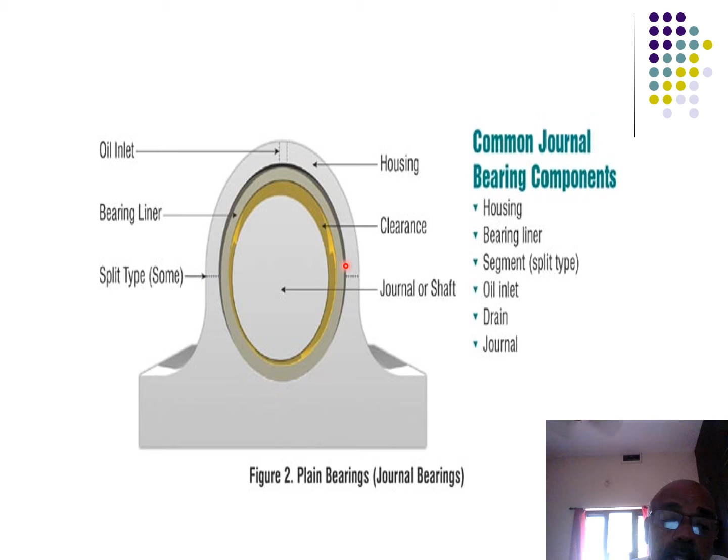This is journal bearing, as I told you. Clearance will change from maximum value to minimum value during the stationary part. When it is rotating, the clearance value will change. In this clearance area only we are providing the lubricating oil. This is another version showing clearance, mentioned along with terminologies: load, rotation direction, loaded zone, etc. Some terminologies are also mentioned in this figure.

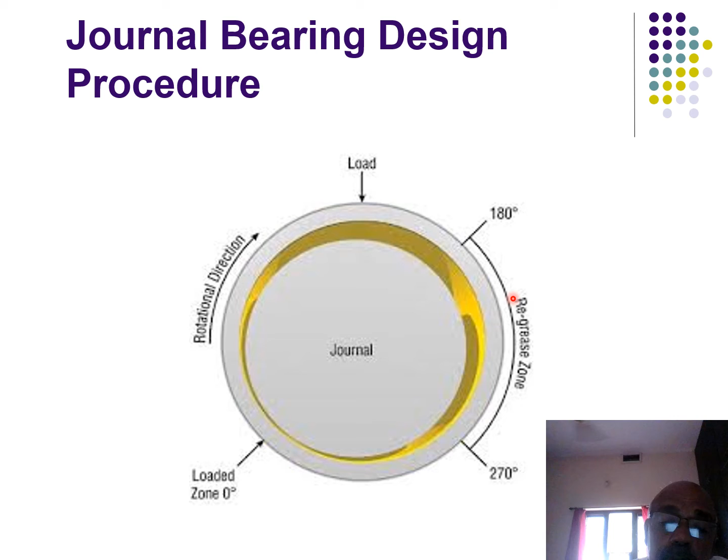Diameter D, when you go for calculation, the fundamental point is how to fix the length and diameter of the journal bearing. For that, one equation you can use is capital P by small p into D, where capital P is the load, small p is the allowable pressure, D is the diameter of the journal. Suppose you want L, capital P already load value will be mentioned, p you have to get from the data book, D also you have to fix.

But simply fixing also no use. For that you have to check with another equation, the L by D ratio, from the page numbers mentioned here and here. Corresponding pages you have to check whether, after calculating, you get one value of L, no doubt. If you substitute all the values you get L. P is given, small p from the data book, D you have fixed. But don't think the calculation is completed — you have to go for the L by D ratio. For that, the typical page you have to see based on the application selected. The L by D ratio matching with your D value and L value means your calculation is correct.

If the L by D ratio is not matching, you have to change the value of D, because you are calculating L, so definitely D only needs to change. This trial and error method will continue for some time until finally you reach the L by D ratio value, and then you can fix the L and D values. This is the basic design of a normal bearing.

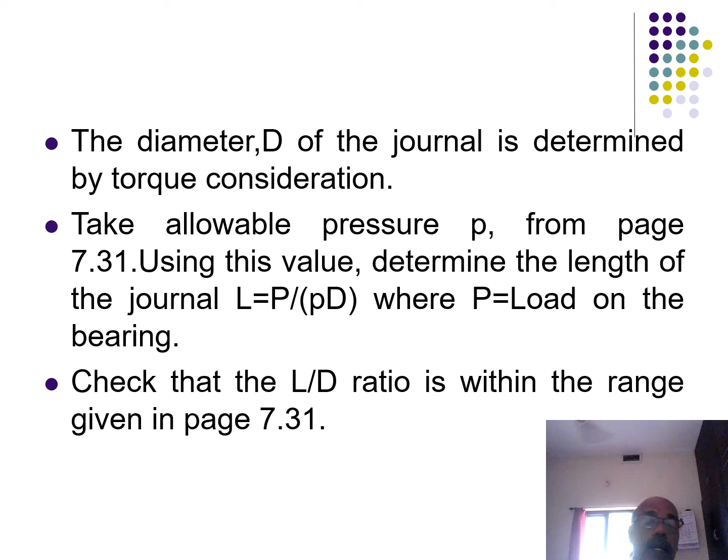For that you have to fix the value of speed. For that, again one more equation will help you, called McKee's equation, to calculate the viscosity. Viscosity you can substitute here, and finally you can fix the value of speed of the shaft. If the speed is given, directly you can fix the Z value; you need not check with McKee's equation.

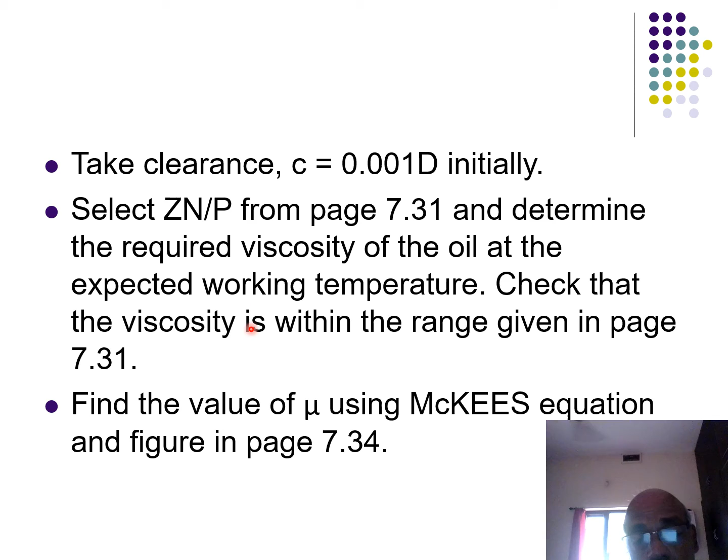That is the viscosity. What you have to do is again go to the application page, to see whether that viscosity value is mentioned, so your calculation is accepted. Suppose the data book viscosity value and your calculated viscosity value are different, then you have to check the calculation and make corresponding corrections.

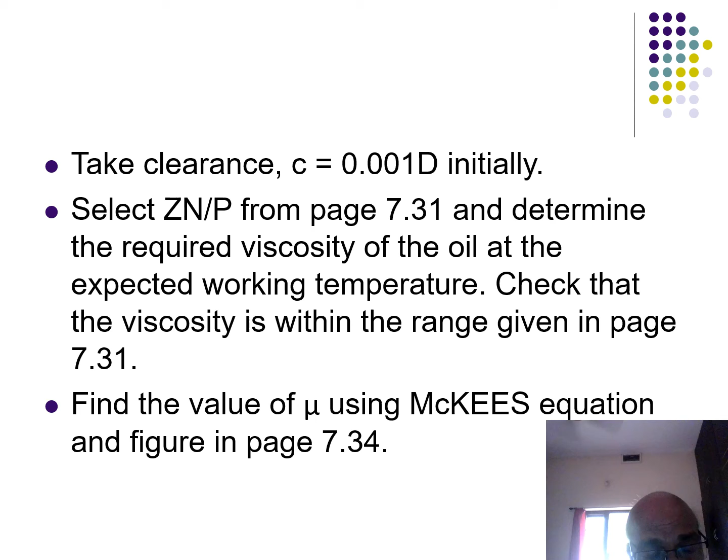Now one more step is there. I told you during the rotation heat will be generated. You have to tally the equation: heat generated should be equal to heat dissipated. There are heat generated equations available in the data book, and heat dissipated equations, empirical relations, available in the data book. When you substitute that equation, finally you have to see that both are equal.

Then only you can see that heat is not accumulated in the bearing. Suppose it is different, heat will be accumulated in the bearing, and finally the bearing will collapse after some time - not 1 hour, 2 hours, but after 10 years or 12 years it will collapse. Some other time it will be slightly greater, which means no problem - heat generated slightly more also, heat will not accumulate so much, that's also permitted.

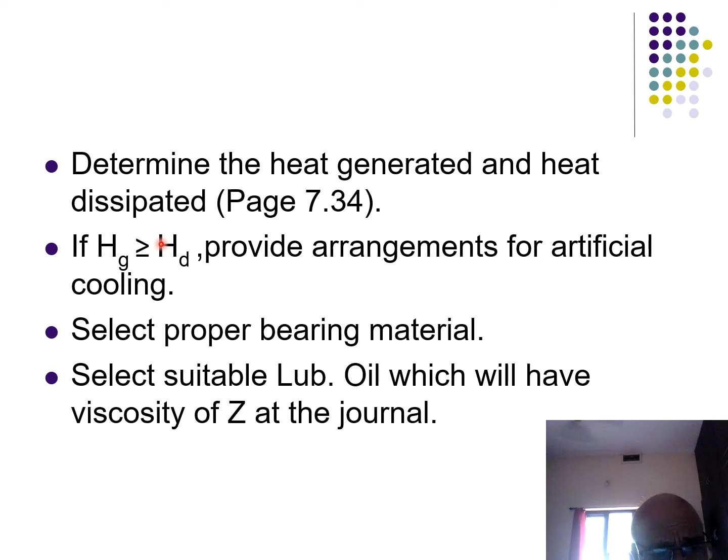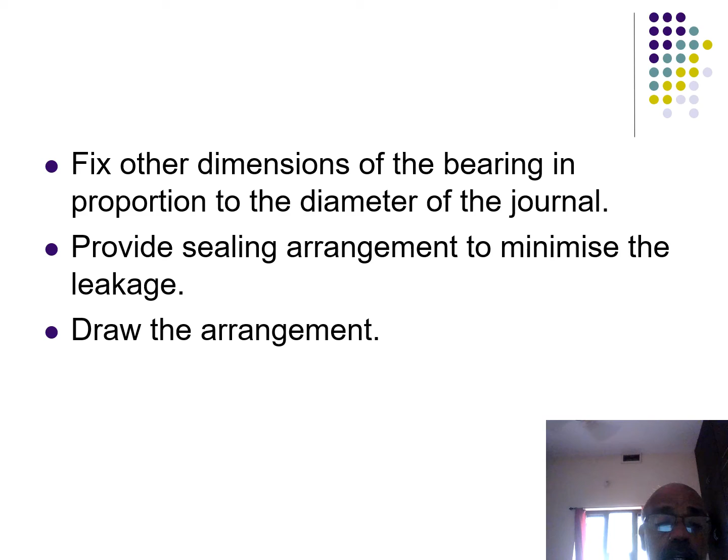Fix other dimensions of the bearing, in proportion to the diameter of the journal, provide sealing arrangement to minimize the leakage. Draw the arrangement. Rolling elements of bearing - this is nothing to explain here.

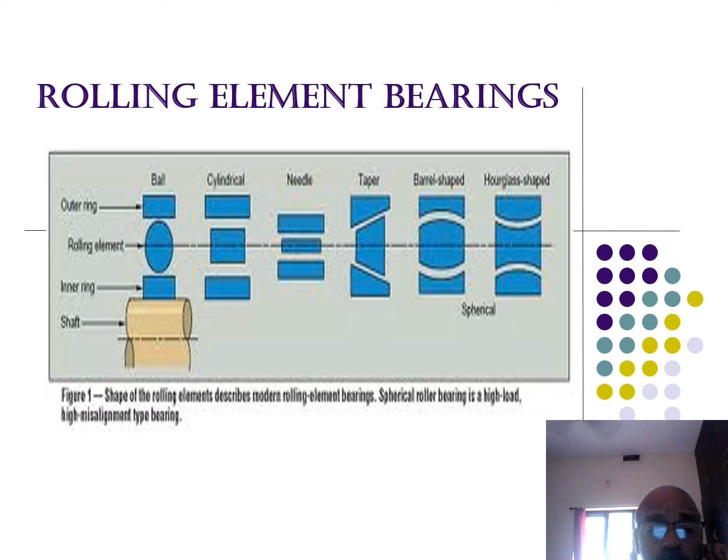Using these photographs, you can see ball and taper bearing, roller bearing, ball bearing and taper types of bearings. Ball and roller bearings' characteristics: frictional resistance is less, rotating or non-rotating pairs, ball or roller has rolling contact. For plain bearing the starting resistance is much larger, while for ball and roller bearing the initial resistance to motion is only slightly more. These are the explanations given for ball and roller bearing.

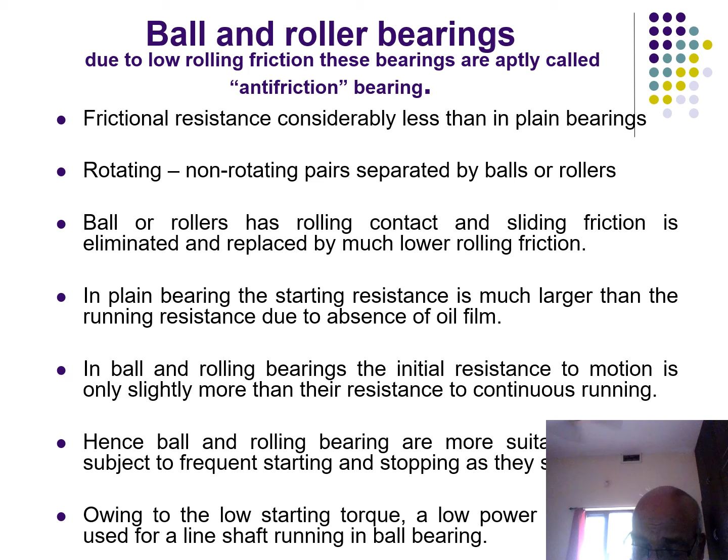Go through and understand. Types of roller bearing: two - single row deep groove bearing and single row roller bearing.

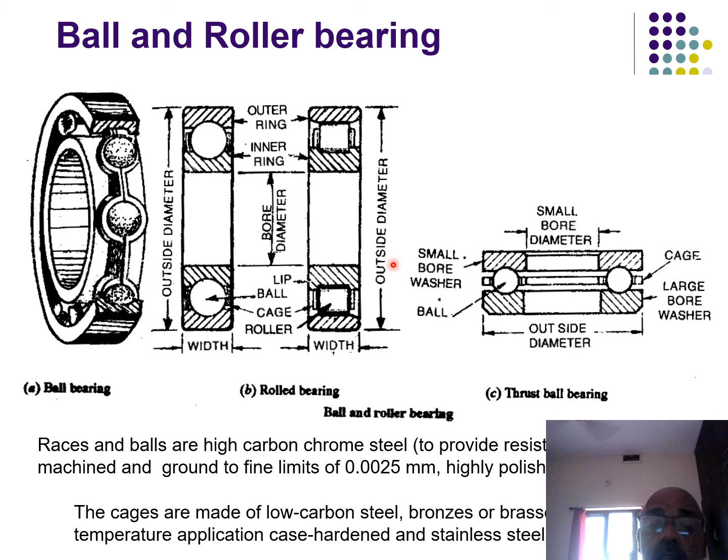Ball and roller bearing, symbolically, one sectional view is indicated here. Using this figure, try to visualize what is ball and roller bearing. Dimensions are also mentioned, and the other necessary terminologies are also mentioned.

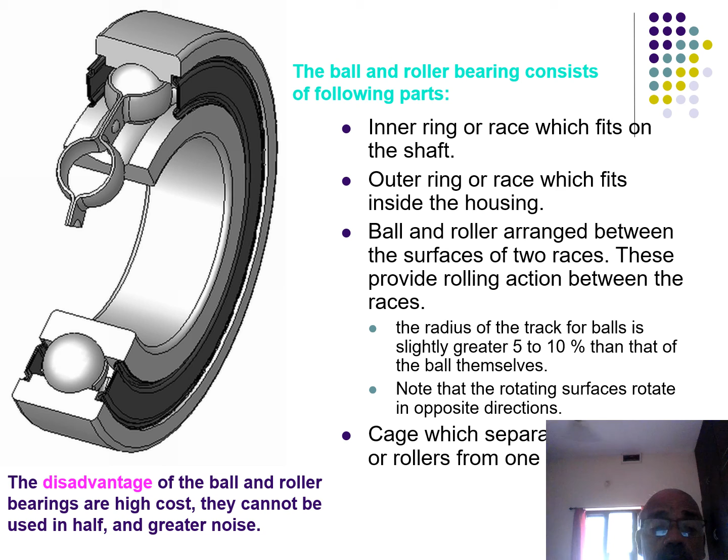This is also roller bearing - another sectional view photograph. Types of bearing already mentioned; this is a repeated figure. This is also roller bearing.

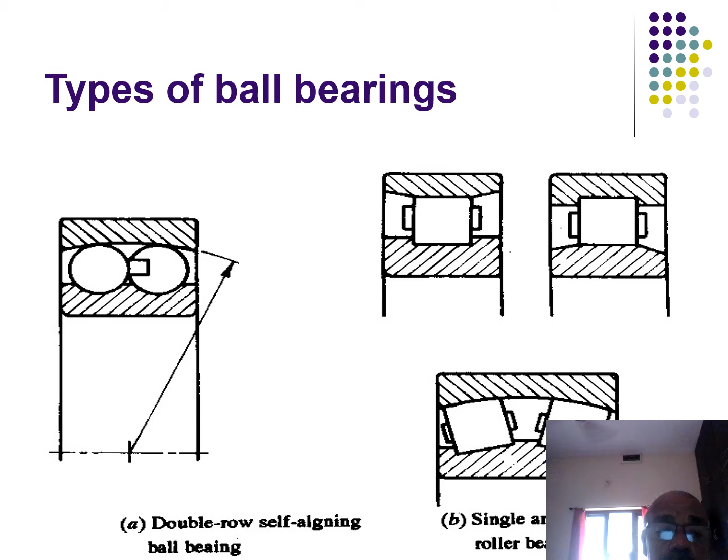Ball bearing, I think repeated again, presented in another way so you can visualize. Deep groove means again ball bearing - the groove will be mentioned in a deeper side. See, from the border, this much depth is there. For there only we are fixing the bearing.

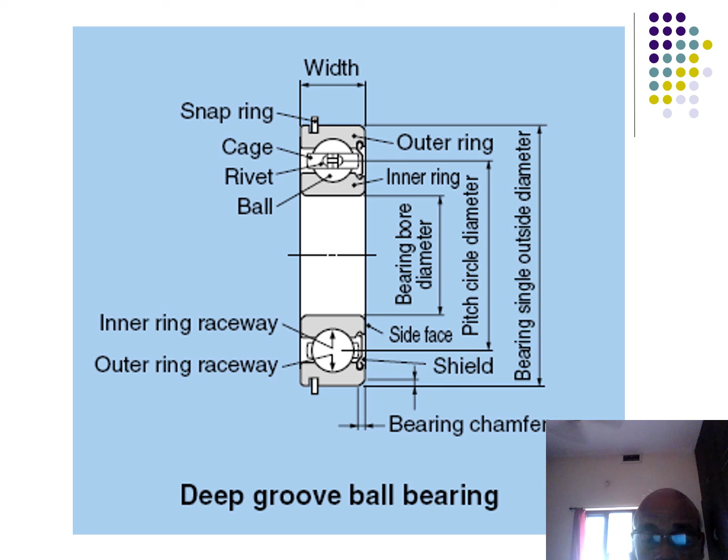Angular contact bearing - angular contact bearing is not relevant with respect to your subject. It's coming only in industrial applications.

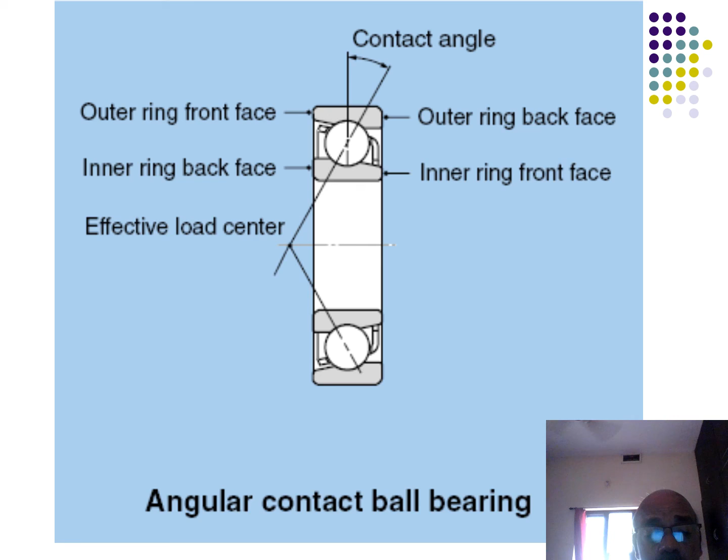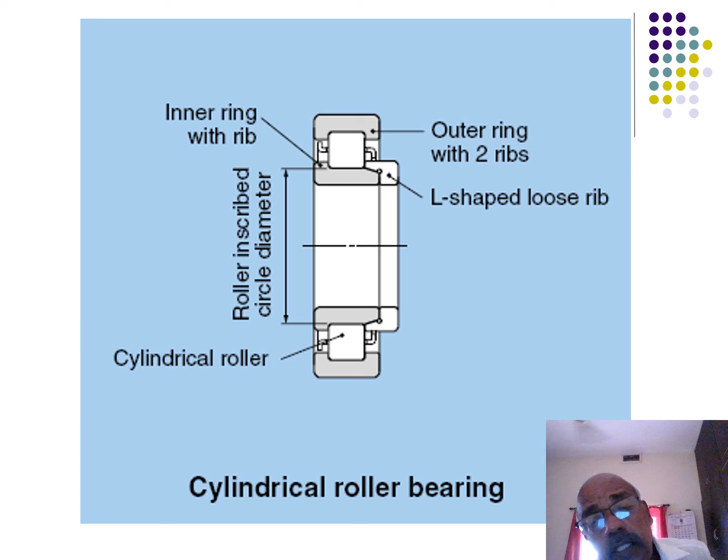Cylindrical roller bearing - for this type of bearing, what you have to do is just remember the geometry and the terminology, just to visualize. At least for short note questions in examinations, besides numerical parts, they will ask for this type of design.

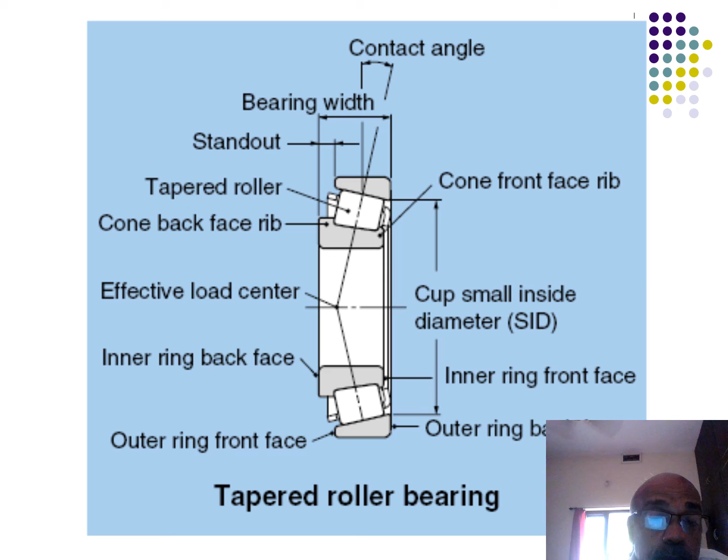Suppose you are a design engineer for bearings in the industry - again you have to take back, and you are already having the data book. Nothing is complicated. For each element you can get the dimensions and give the dimension for the fabrication section.

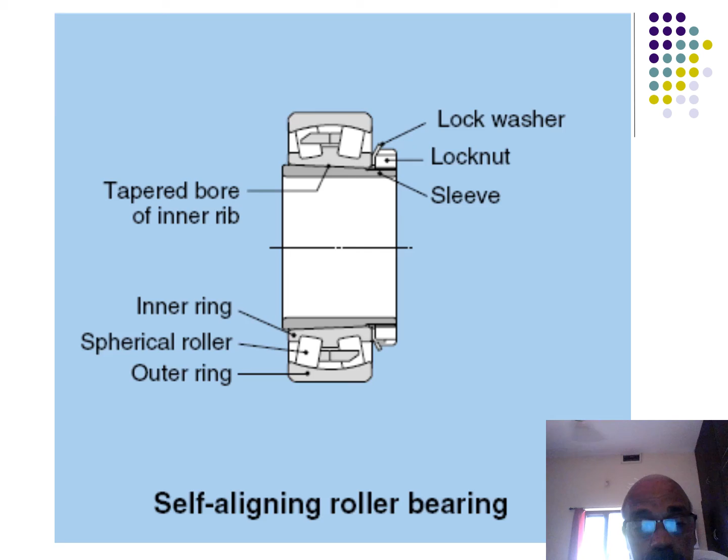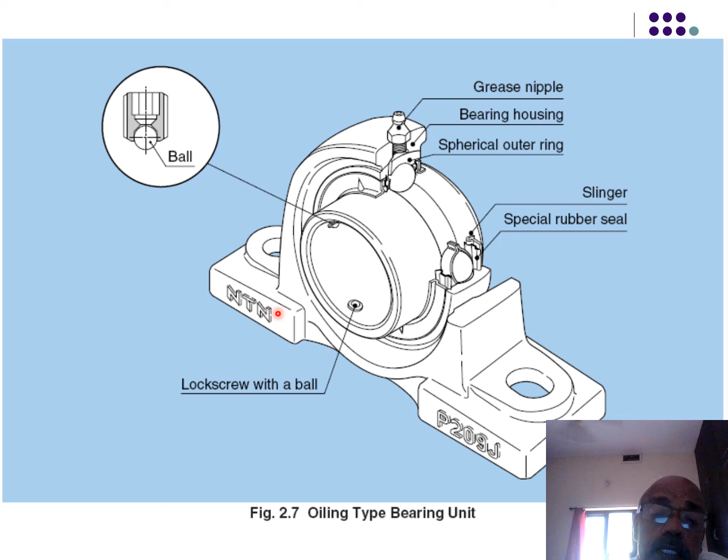This is re-lubricated sealed ball bearing. So another version, this is also another pictorial view of oiling the type of bearing - how to oil, how to lubricate. This is the grease nipple; from here the lubricating grease will come. As it rotates, it will be provided throughout the 360-degree clearance of the journal bearing.

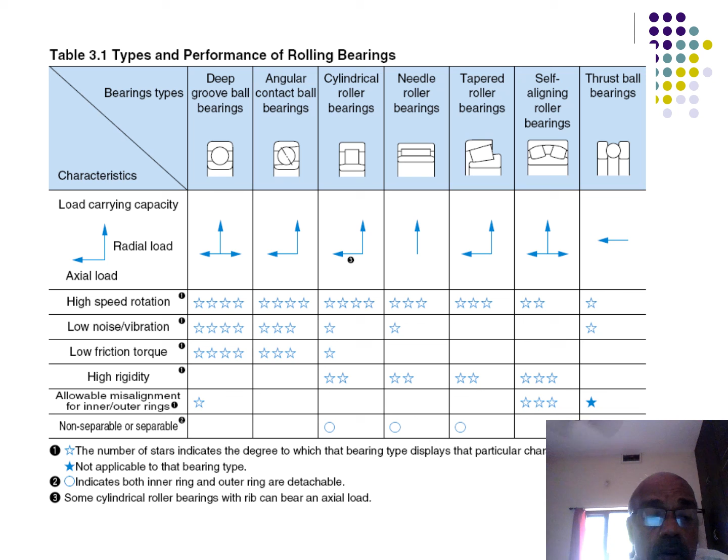Types and performance of rolling bearings - this is not important for you. This is again another pictorial photograph of roller type bearings.